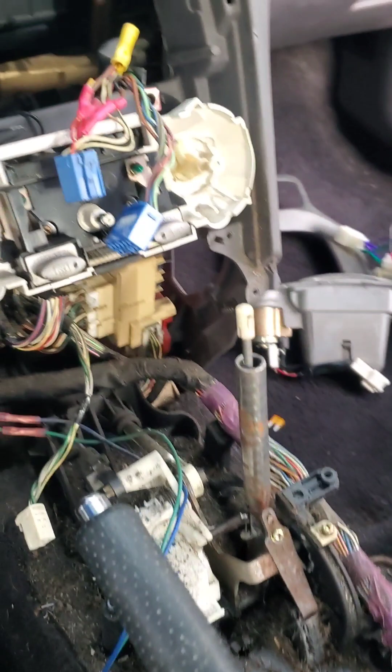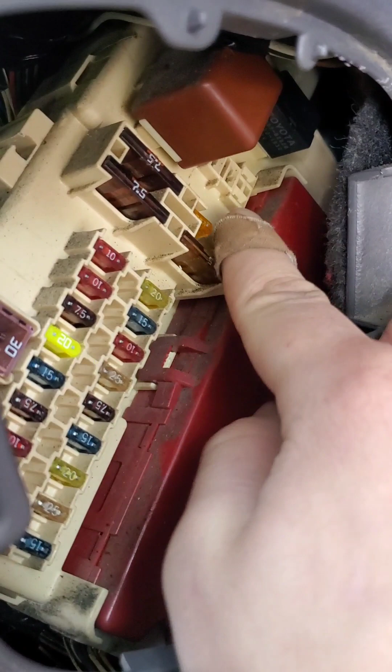What do you do when a fuse blows every time you put your car in reverse? Well, you get out common sense, wiring diagrams, and tear apart your car. Now, if this was a normal fuse, it'd be even better. But they have these fuses that were only used in a Toyota Celica. It fuses 4 things instead of 1.

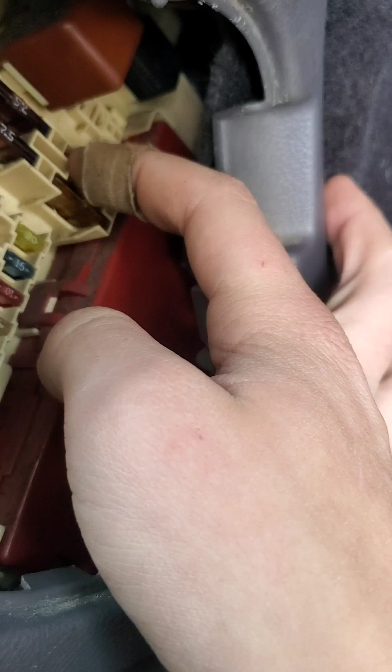I have this fuse here, and these 2 ports are the ones that blow, so I fused that so I could test it. So I tested it to ground just to make sure. And every time I put the car, this used to be the shifter, every time I put the car in reverse, right there, the fuse would blow.

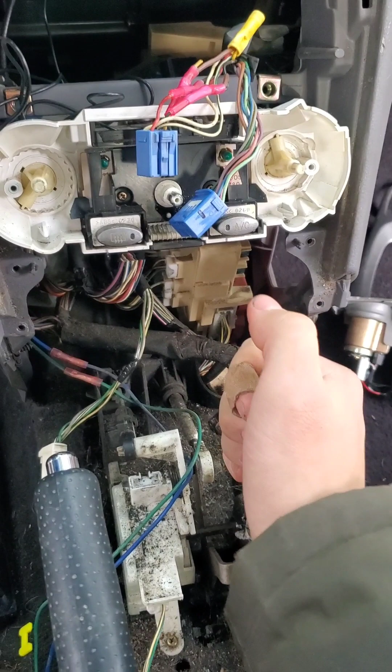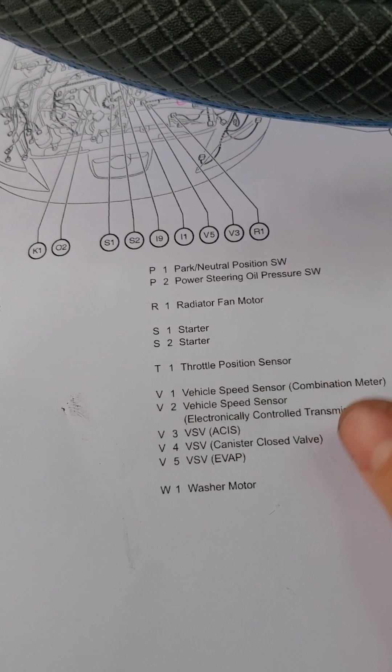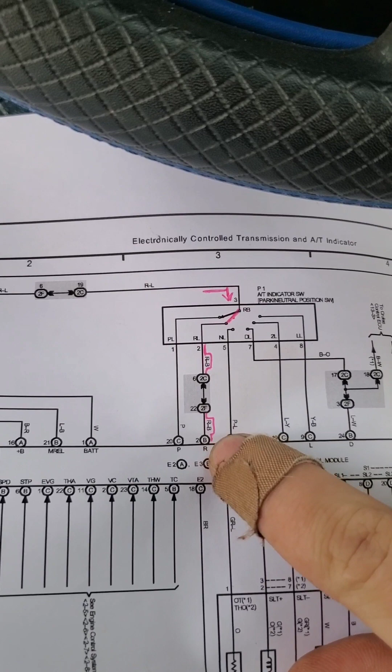So, what could possibly be the problem? Well, I got out wiring diagrams. So, on the transmission, there's a connector there called P1. And it tells me that that is a park/neutral position switch. Okay, what else do we know? We know that these are the positions that it does and where it sends power. So this is reverse. Sends it through that to the ECU. Well, probably not going to be grounded at the ECU or past the ECU, so it may be here.

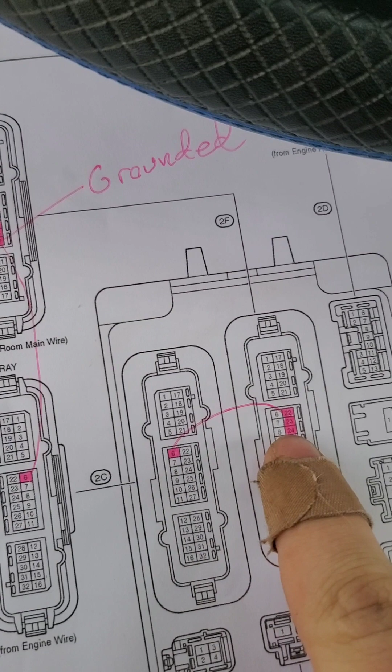So what is that? Well, that's this. It comes in on pin 6, 2C pin 6. You can see here, 2C pin 6. And it goes through to those 3 pins. And I know it goes to those 3 because this is the internals of this box here. And you can see here it goes in there. It's jumpered to those 3 and goes out.

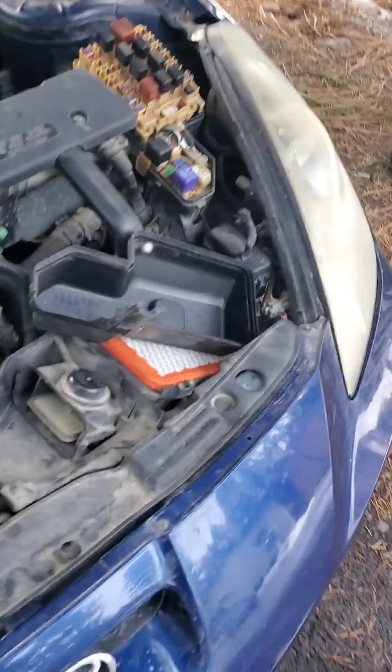So, once I found that out, I came to the fuse box here, disconnected the wires, and I tested pin 22, 23, and 24 to see which one was grounded, and pin number 24 was shorted to ground. Oh, where is the right diagram here?

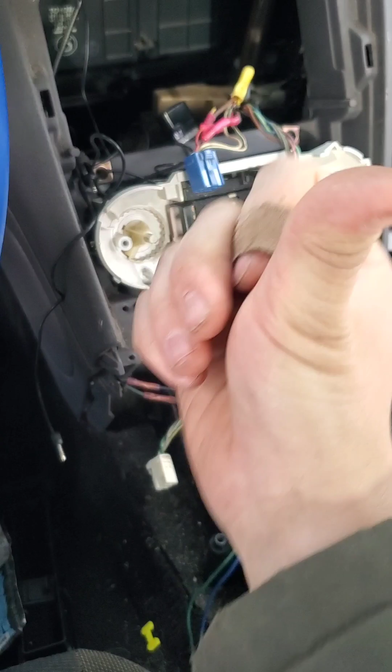Okay, I don't know where it went, but it said it went through to the back tail lights, and it went through this connector, IH1. And to find out where IH1 lives, we have this, which tells us IH1 is in there. And so I took this apart, and here we go, IH1. And it's shorted to ground on the back side of it, which means it's after this and that way. And then there's a junction connector that it connects to between there and the back.

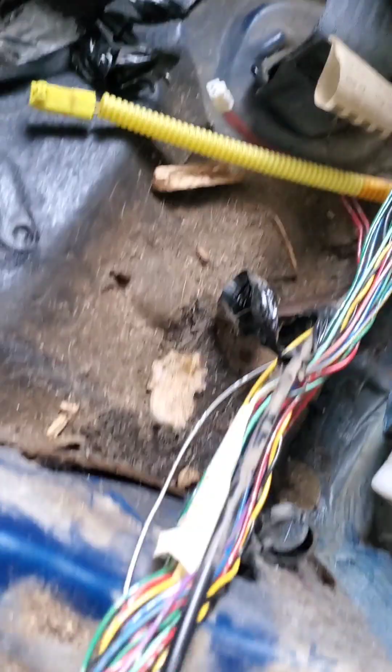And the junction connector, well, I don't know where that piece of paper is either. That junction connector is right there. So it jumpers those 2 pins on top together, and it sends one to the left side, one to the right side. And so I've started looking at the wires. Where do they go? Where can it be shorted?

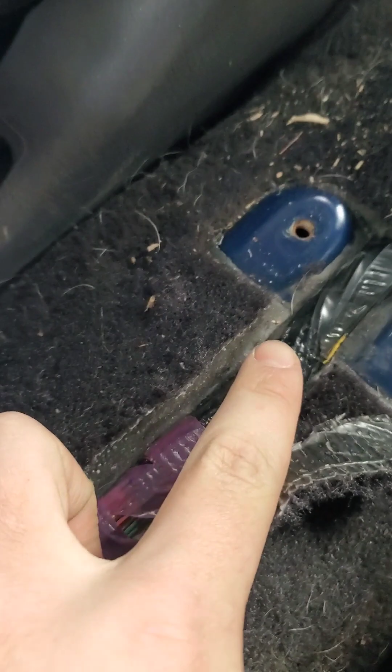Well, one more thing before I did that was I tested this side to see which side was grounded. And this side was grounded. So it's not towards the tail lights. It's between here and our connector up there in the middle, that black connector there, II2. So I started looking through, pulling the insulation off a bit. Then I found this. This looks promising. It's a little melted. I had to cut the carpet to get here. But we shall see whether this is the problem or not.

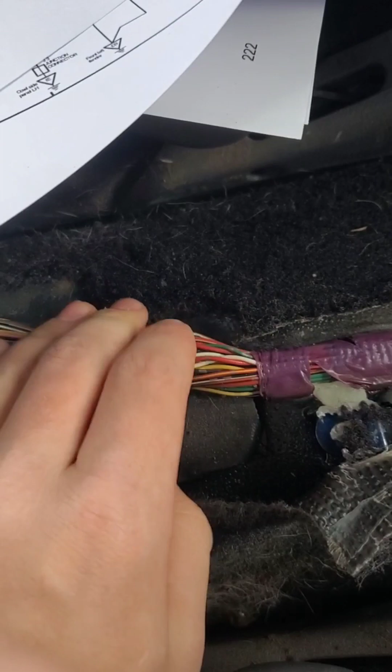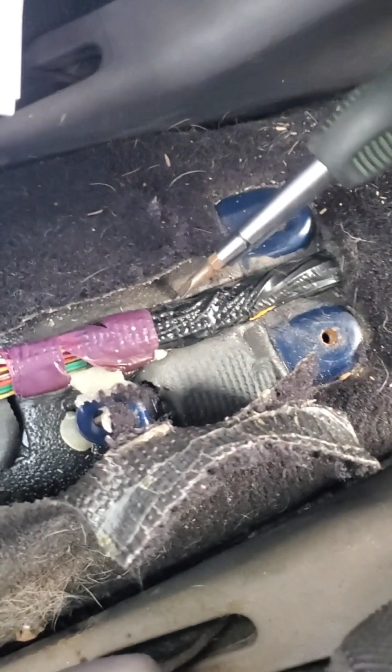Okay, looking even closer. This is super melted. I can't even pull it out of what it melted into. The clip is melted. Something bad happened here. And so I'm gonna see if I can dig this out. I'm gonna get myself a knife and some, I'm not even sure yet. And I dig it out with a screwdriver. I don't want to mess up the wires. Man, it's embedded in whatever that is. Well, let's get the knife.

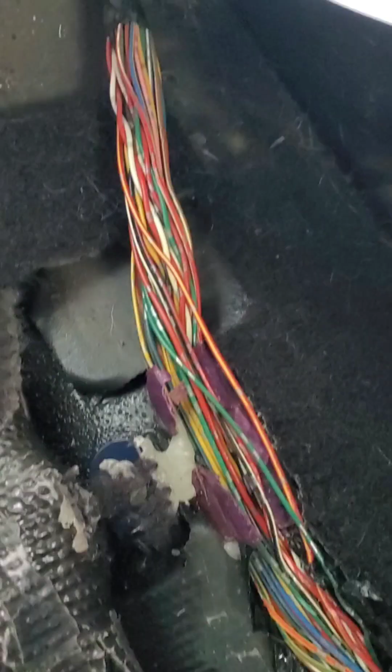Try cutting this out. Okay, I got the insulation off here. Now I'm trying to just pull them out of this melted mess one by one. It's not completely melted, but they are sure stuck together. And I'm guessing once I get to the bottom, I'm going to find some that the insulation's melted through, and that's where I'm going to find my short. Okay, we got the wires up, and under here, you can see it's gotten through the insulation in some places.

So now that this is up off of touching the metal here, let's go back here and test again for continuity. Sorry, I need 2 hands for this, but as you can see, or not here, I suppose, no ground. Now that is great.

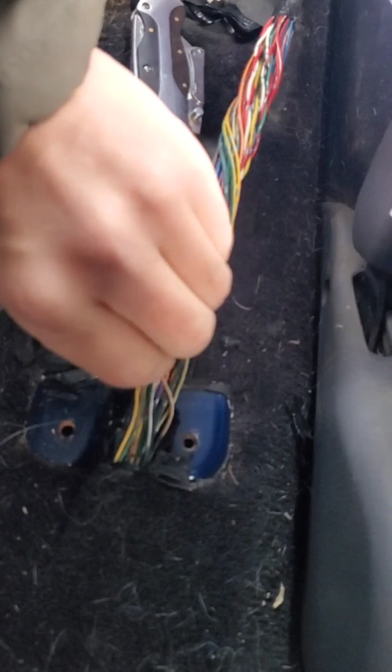Now I hope that these wires are all okay, because that's quite a bit to be melted here. I can wrap them so that they're not touching this anymore, but I'd have to cut the wires here and cut the wires here and redo it in order to make sure that all the wires are okay.

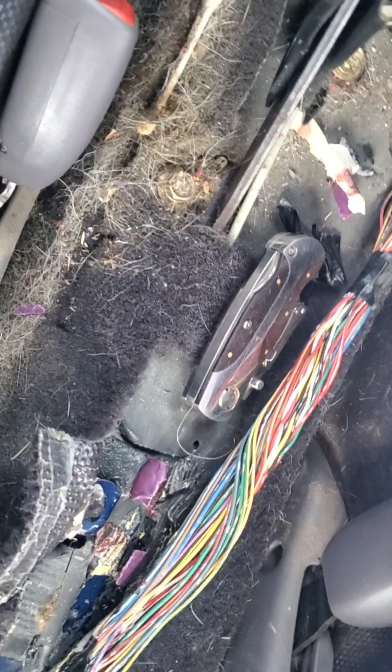Now, here's why these are melted. So here, underneath here, is where the exhaust goes. So that's probably why they're melted. Either it just took a long time and they melted over time, or there's a missing heat shield or something. I'm gonna have to take a look at that. But I'm pretty sure that's why they're melted like this. So now I'm gonna wrap everything up, and hopefully that fixes it.